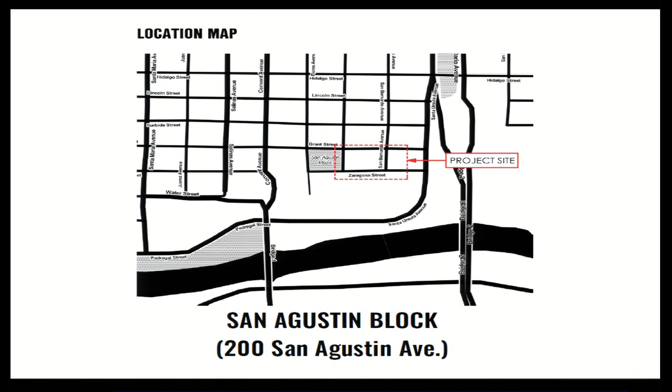All right, so here's just a quick map of the location. We all know where this is. Yes. All right, Historic Plaza.

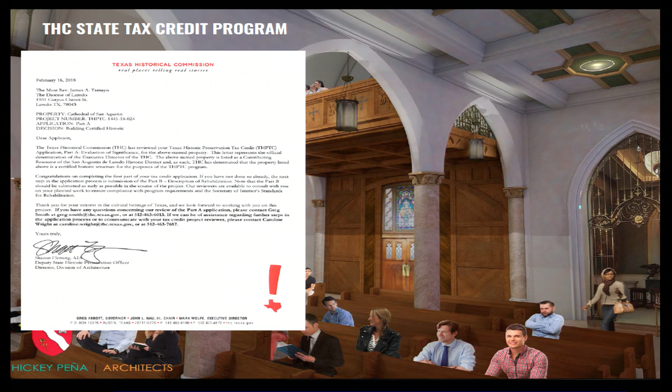Just a quick note, and I'll let Frank elaborate more on this, but we have been approved for the tax credit program, the preliminary approval, the Part A. Frank, do you have... Yes, so, yeah, we're really happy about that. We submitted this project to the Texas Historical Commission to be considered eligible for the State Historic Tax Credit Program. It's a three-part process. Part A we've completed, which designates it as eligible. The way that works is we can bring back 25% of the approved costs for rehab and restoration.

Any historical significance, those are applied, and that's Part A, which has been approved. We're currently in the Part B portion, where we've submitted all of our drawings for review, and they are now in the process of checking off what is eligible. It runs concurrent with the construction, so we're on target. Part C is once everything's complete and documented, that's when we submit the last part of the process. We're right in the middle of that process as we speak.

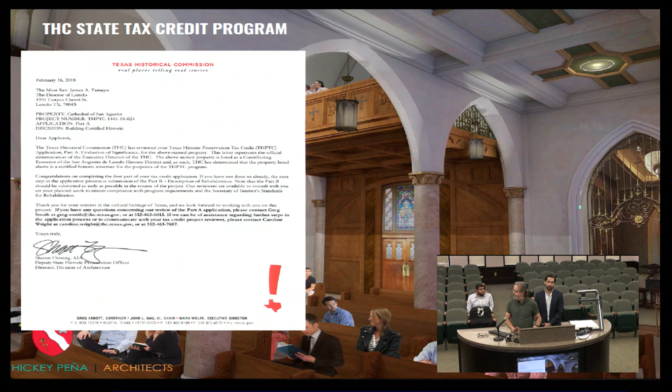Also to note, because this process is underway, and because of the status of the cathedral with the state, we have been interfacing every step of the way with all of the design approaches we've taken with THC, and we've got some approvals from them here to show you for our approaches and necessities for the project.

This first one here is almost maintenance, but we are working with a new consistent color. The fencing around the cathedral, noted here all the way around both buildings in red, is slated to be repainted, and we've submitted a paint color for you to consider.

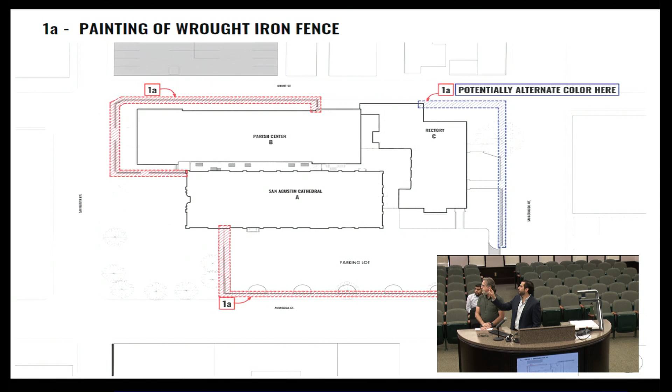There's also a blue portion of the fence that's higher, and we're asking you to approve an optional second color for that. We need to do some studies on site, painting a good portion of it to see how that's going to interact with the streets, the much taller fence.

Right now it's painted white, that area is a light color. We fear if we paint it dark, it's going to have an adverse effect on the look of that corner. For consistency's sake, we're planning on attempting the color in dark, but if we feel it's too imposing or too character-changing, we're going to go with the white that exists now.

That taller fence, is that at the rectory? It's behind the rectory, correct. It encloses the carport that exists there for service access. It faces San Bernardo and then a little bit of Grant Street as it turns the corner west to Grant.

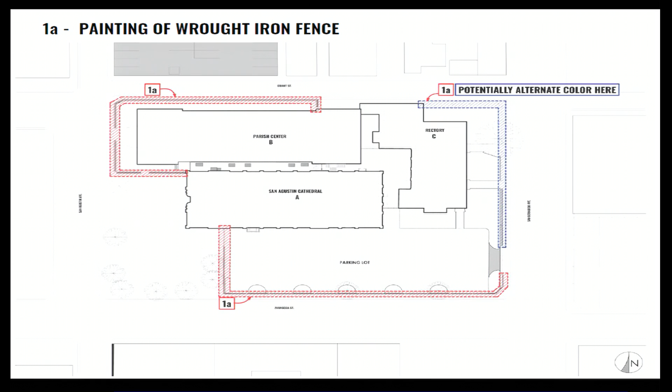So then everything in that perimeter is going to be the same color? Yes, obviously, except not the plaza wall - there's a wall that is all masonry that faces the plaza, that won't be. But the wrought iron, correct - yes, everything that is wrought iron would have the same color, with the exception of that portion we mentioned.

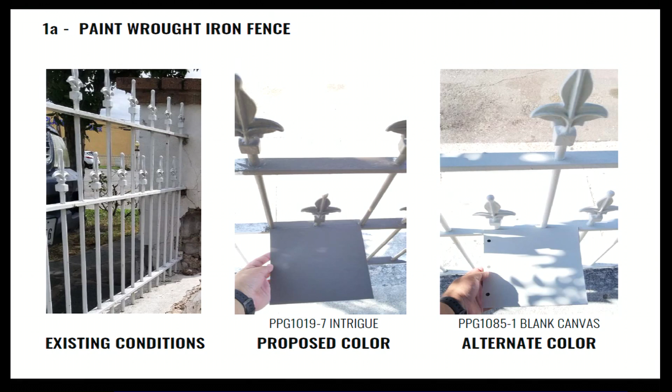All right, so the next part, are there any questions about that one? Do you foresee, like you said, you're going to try the dark color first, and then if not, switch? So we're kind of approving both here? Yeah, we're asking for approval for both, or for either. For either, both, either, yeah.

All right, so this next one is fairly straightforward. There are some mechanical units that were placed sometime in the past. We know that it's later than 1955 when all these units were installed, and obviously they've been replaced along the way through several maintenance campaigns.

But there are mechanical units scattered throughout the alley between the parish center and the San Agustin Cathedral, and there's one unit on the south side of the San Agustin Cathedral. That's this portion marked here, and these are the compressor units for the HVAC that's in the cathedral. Those are an issue.

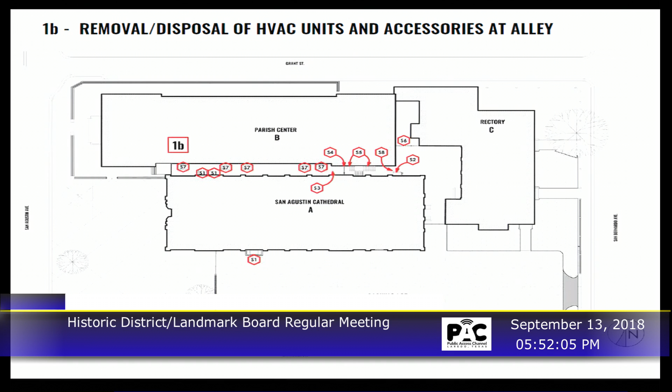Because they generate the most amount of noise coming from the outside, which deters the spoken quality of a mass. Our strategy here was to remove as much of that to mitigate the sound intrusion from all of the mechanical systems. So this is part of an overall plan to remove mechanical units from around the building. There's also, I think, a very nice visual benefit to removing them. Obviously, these are modern elements that weren't there in 1877,

But the noise factor is really significant. So our strategy is to move all of the mechanical tonnage on the exterior off-site. They're not being replaced here on-site. They're being replaced off-site at a parking lot owned by the diocese, right in a corner.

If you're all familiar with the property just east of this, across the street, in that corner, we would be putting a chiller system, and it's one unit that is sized to take care of all of the cooling needs for both the cathedral and the parish center.

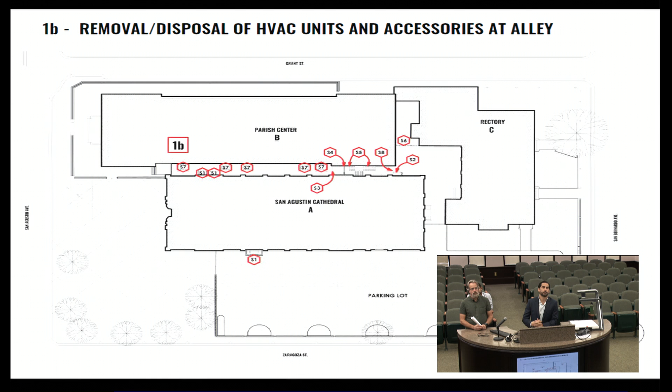So, the parking lot, that space, is it across the street from the old school? From the plasma center? Oh, from the plasma center. Back here, it's between the cathedral and the Antigua. Mm-hmm, okay, it's right next to the museum. Yeah, it's by the plasma center. So it would be very far away from this most significant historical structure, which I think it does well, to keep it away from that.

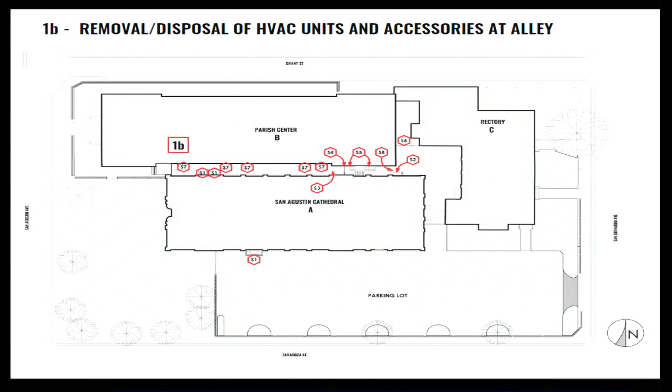Efficiency-wise, and the way we can now size it, so that when the parish center eventually hooks up to the same unit, it could take the same benefits. We would be able to remove the compressor units that are feeding the parish center, so we'd be free of compressor units all the way around both of these buildings.

I know you said Building C was not going to be affected, but will the rectory also make use of that, or does it have its own? It has its own system, and we didn't see the benefit to using it. It's new enough and it's fairly well resolved.

As you know, in 2000 it underwent restoration after the fire, and a lot of these more modern resolutions to the HVAC system have been resolved already from a historical standpoint. In these two buildings, that hasn't happened. So it's now bringing in a compatible type of system to allow for a more historical resolution and the preservation of the historical character on the interior of the building, because the HVAC units, I think, are a hindrance to that.

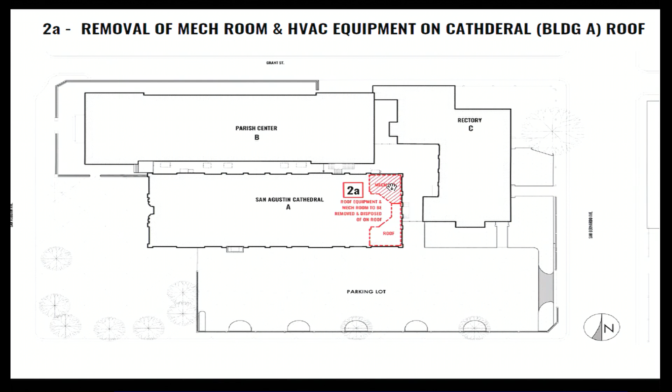Just pictures of the units that are going to be removed. So this is a portion of, again, the mechanical units that will no longer be used. They're housed in a modern mechanical room that was built over the sacristy. The sacristy was built circa, we dated it from between 1945 and 53, when that expansion of the sacristy and the sanctuary was constructed.

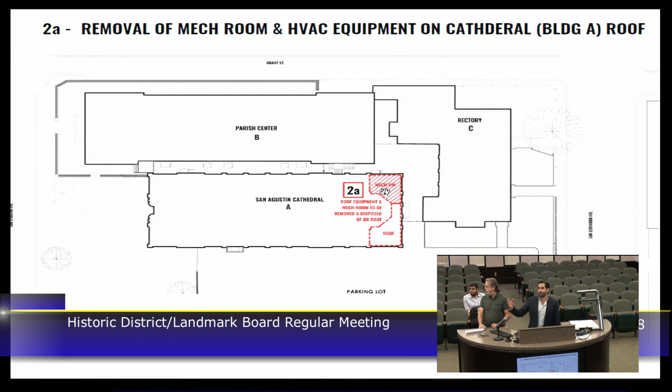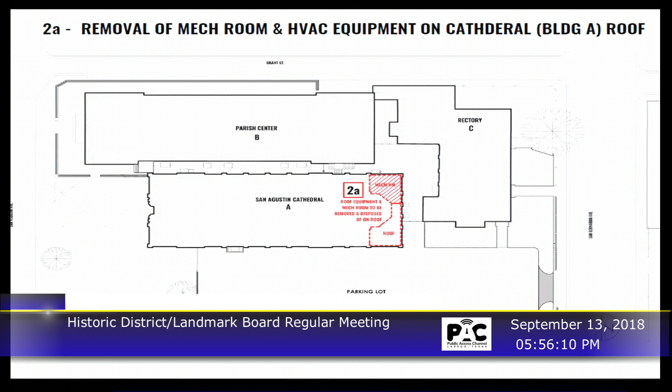And then after that, a mechanical room was built over the northeast end, covering a historic window behind the altar. So now that historic window has a fluorescent light inside that attic, to simulate the light from the sun. So we have the opportunity now, with these new systems we're installing, to eliminate that completely, and to bring that east portion of the facade back to that campaign that happened in '53, where they expanded the sacristy, and prior to the building of that.

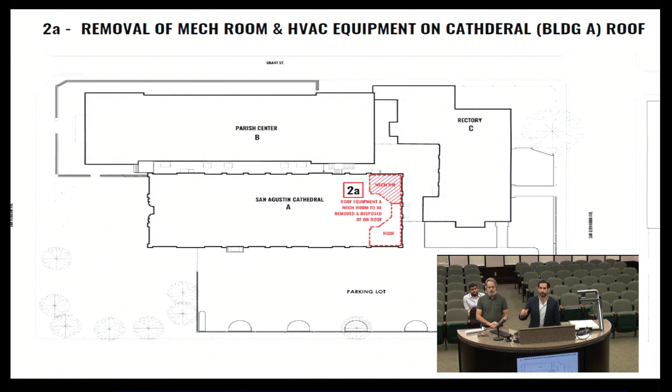So here's a picture of it. This is the portion of the building that was added when the sacristy was added. There's a duct that we all don't like going around the back of the cathedral, around the sanctuary, creating a taller volume of the building. And then these are walls that were built over, the more historic walls of the sacristy.

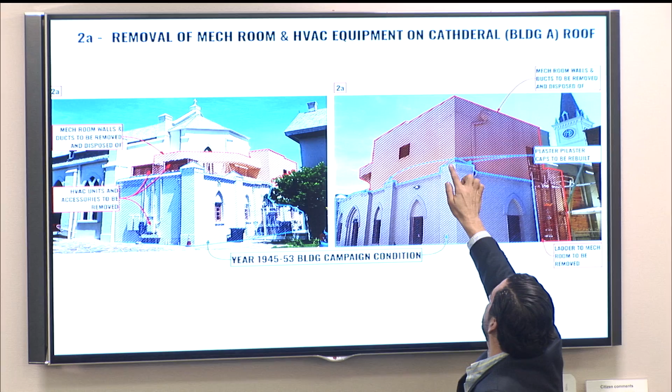So as you can see, we've outlined here in blue where we're removing the new and keeping the old. And we're reconstructing some of these caps to match the ones on the other side.

I have a question. I know at the beginning of your presentation you discussed working with THC. I understand THC has already given the green light, and I don't want to jump too far ahead of your presentation, but to some aspects of what you are proposing here before us. But have they, and I realize you're talking about something that was added in '53...

...but has THC looked at the proposed demolition of that mechanical room? Of this modern mechanical room? Yes, they have looked at the entire project. Okay, they reviewed it and they have had no comment on this particular one. We haven't gone and specifically pinpointed that question to them.

As far as we knew, the order in which we approach THC and we approach this board, there's been different approaches to that, like which comes first. So what I could tell you is our conversation about the whole thing is ongoing, and this will come up soon, but going to this board and having you consider that, I think is independent of THC for the most part.

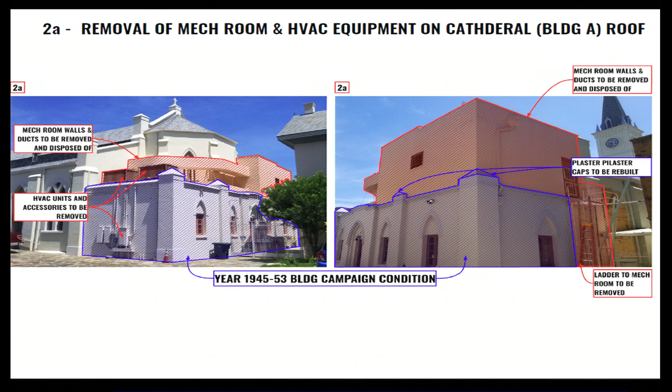Do we have it in writing that they say it's okay to remove this? No, but they said it's okay to go back to nineteen fifty-three, and that's what we're doing. So I see it as an approval.

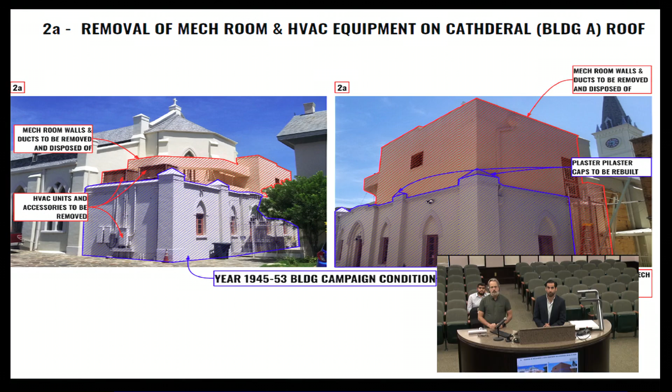So, it's almost like a prerequisite for a request that they've already approved, to go back to nineteen fifty-three. I understand, with research done, THC said that they were not aware of the demolition of the mechanical room. Got it, I understand. Then we're specifically aware of that. Understood.

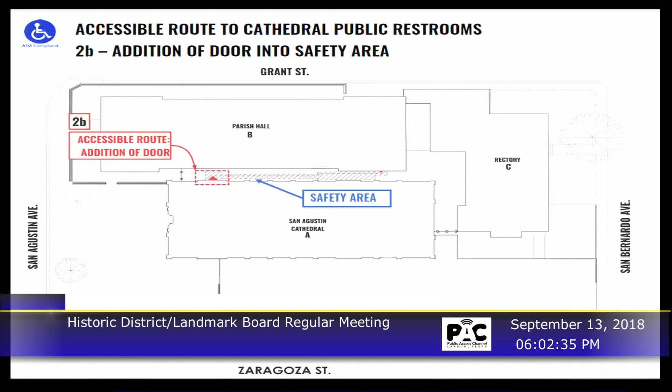Accessible route to cathedral and public restrooms. This is one that, again, we didn't feel was going back specifically to 1953, so we asked a specific question to THC at this moment. Not to say our conversations with THC are over, obviously not, but we did feel like we should ask this to make sure we're going in that direction, and they agreed.

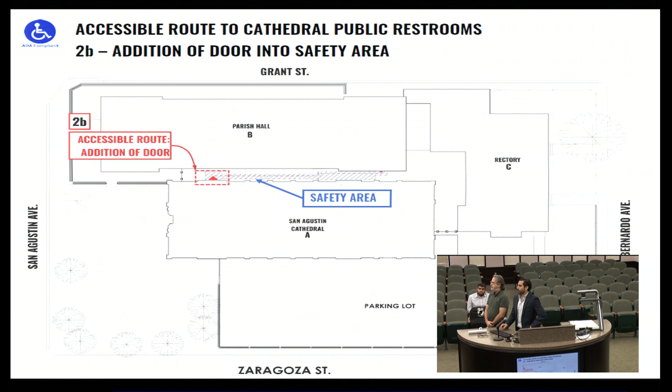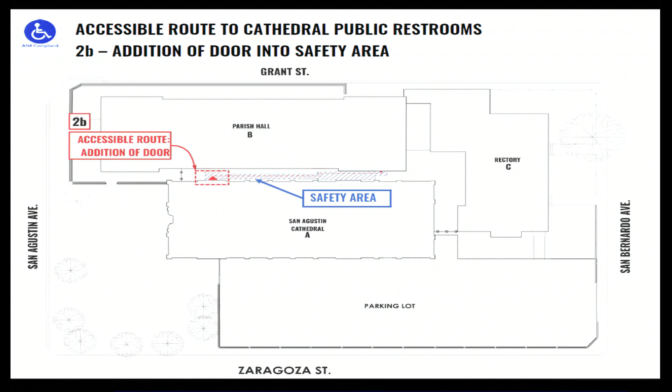So we have planned accessible restrooms where they actually exist now, but we're making them larger. Right now, there's only 2 single compartment restrooms right there inside the parish hall with access to this alleyway. It's not ADA compliant. The canopy that's on there is a makeshift canopy that I'm not aware was approved at any point.

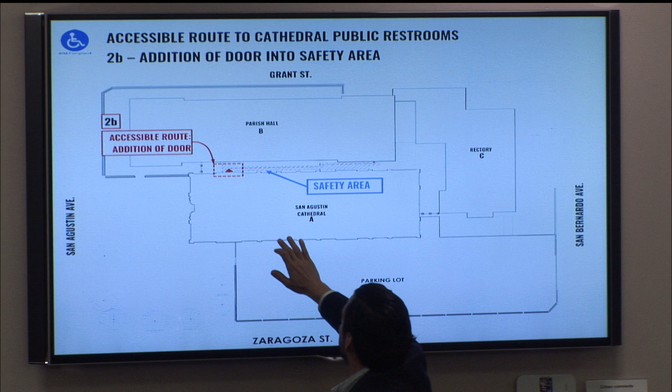Bathrooms are here, and the way to access them is through a safety zone, which is this alleyway. The diocese was very concerned with people having to go, especially kids that need to go to the restroom on their own, then come out into the exterior and have exposure to the rest of the area that isn't within the confines of the facility. It was important to make sure this gate was secure, this makes it secure.

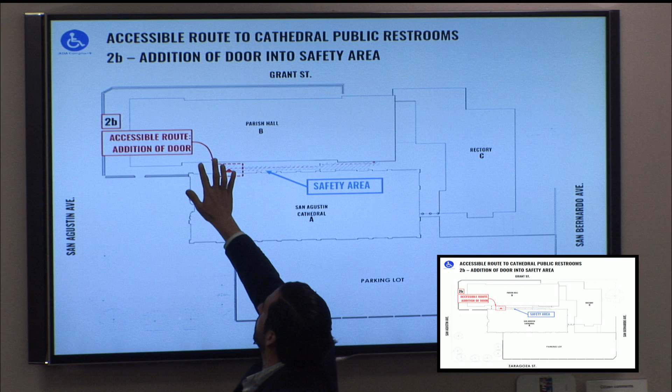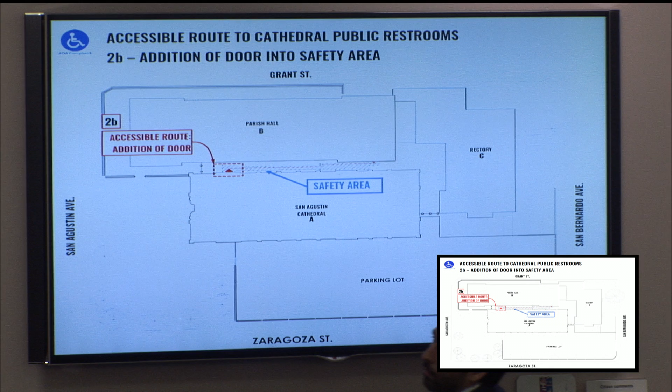So now we have a secure on-premises courtyard, so that our access path from the proposed door coming out of what is now the confessional on the north side. Then we use that path to go and access the restrooms back here, because right now, the only access to the restroom is the door that's closest, on the east side. Correct, that's the only access to that.

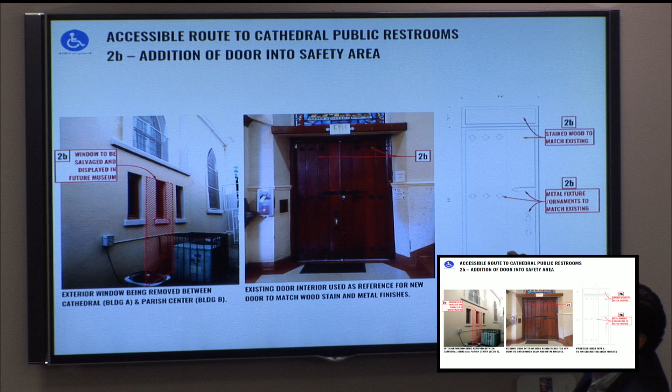On the right, you see our precedents for the door design. These doors are found again on the same side, on the north and west side of the cathedral. These are those auxiliary exits. So we're using this to create a restoration of that, but as a single door for that doorway. So this is then that design for that, all the doors will match. Correct.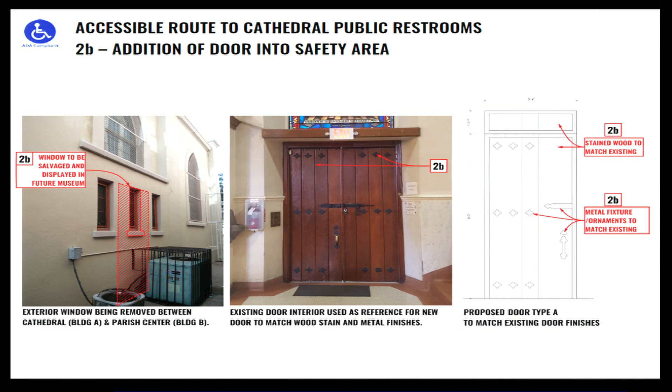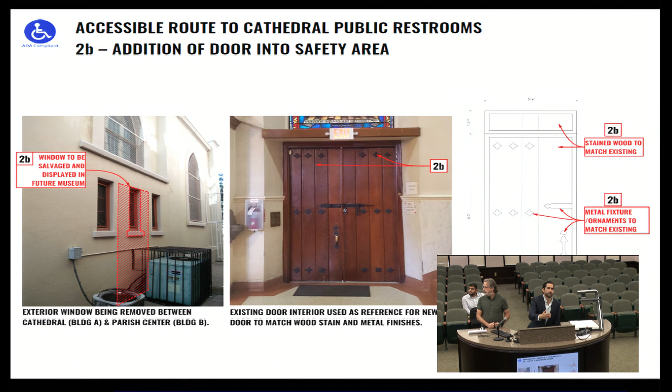And I understand that even those windows date back to 53. Those three windows, some of them we've been able to specifically note date back, not specifically to 53, but definitely prior to the expansion of that altar, because we believe there were two construction campaigns there, one in the 30s and one in the 50s.

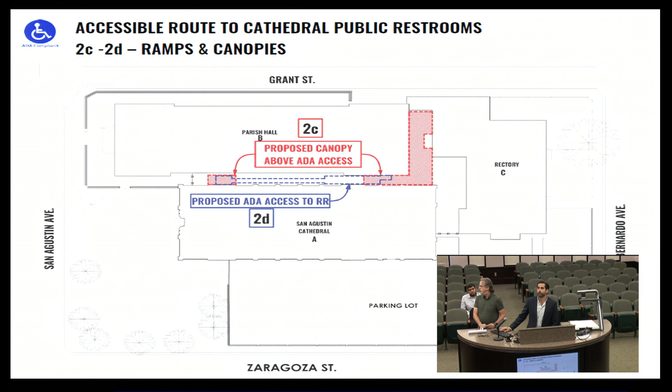Accessible route to the cathedral, again, we're just talking about the walkways and platforms that are ADA compliant to get you into the restroom, and the canopies that give you some cover. These are freestanding canopies. This was a question we got from THC: are they freestanding? The answer is yes, they're freestanding. And when do they touch the building? They touch the building only at the entrances and exits, and they were okay with that solution.

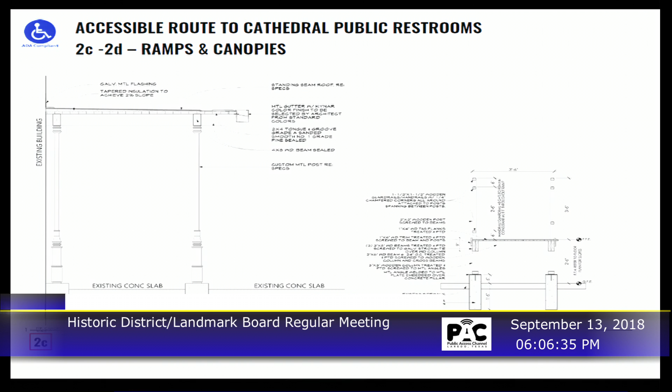All right, this is a section, I'm sorry you can't see it clearly here, the computer isn't cooperating, but just a picture of the wood platform that takes you there, and then a canopy, and there's a little bit of a rendering. So this is the church, that's the school building, and so then we have the system of canopies.

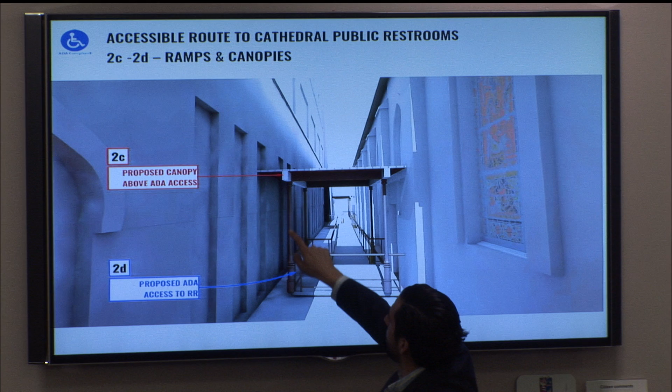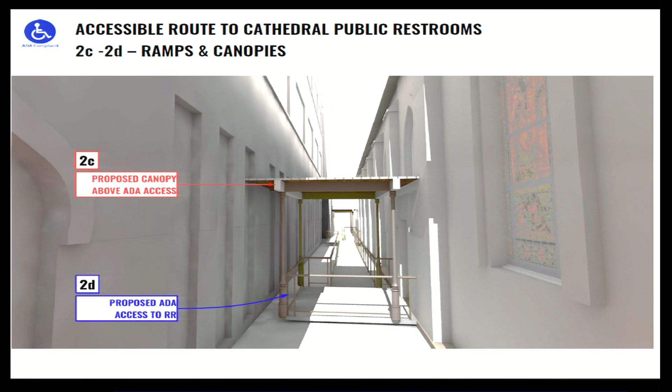We do have some decorative pipes that hold up a very simple canopy. We think it's complementary to the design of the cathedral. It's metal pipe with decorative collars all the way through, and the top is a metal substructure or superstructure, with wood 2x4 stained wood decking with a metal roof on top, and then gutters on each side. So it's a very light design canopy. We want it to be as least obtrusive as possible and impactful as possible.

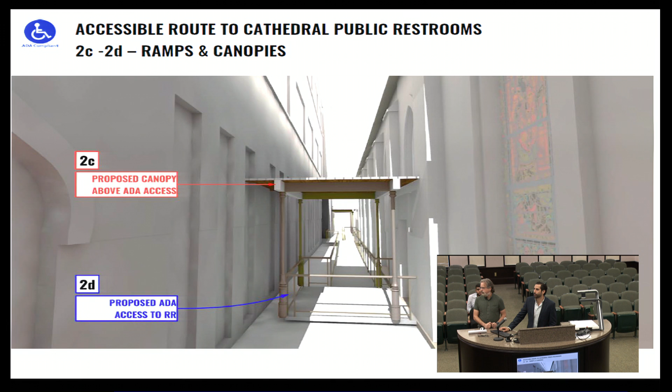The next couple of items are for the parish center. As you may know, part of the construction progress is going to halt the ability for the diocese to have masses at the cathedral, and so we're using the parish center as a temporary worship space.

We've been having to make several adjustments and modifications to the building to prepare it for this. The HVAC units were inside the main auditorium, making a whole lot of noise. Again, we have a problem with the noise, no one can hear the service going on.

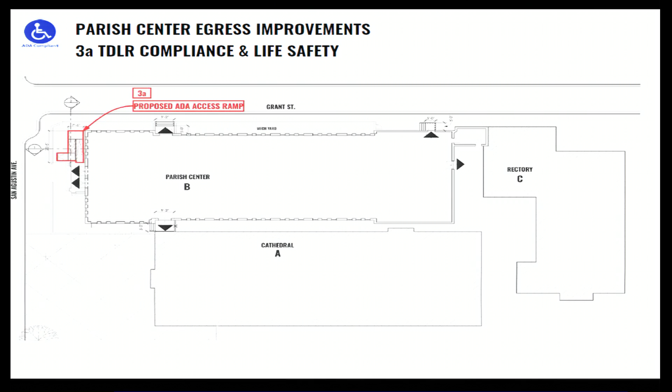We did an analysis, kind of what we did in the church, where we figured out what the long-range needs of that building were, to make sure that any short-term modifications to prepare it for this place to be a worship center were in line with the eventual expenses and modifications to restore the building as a whole.

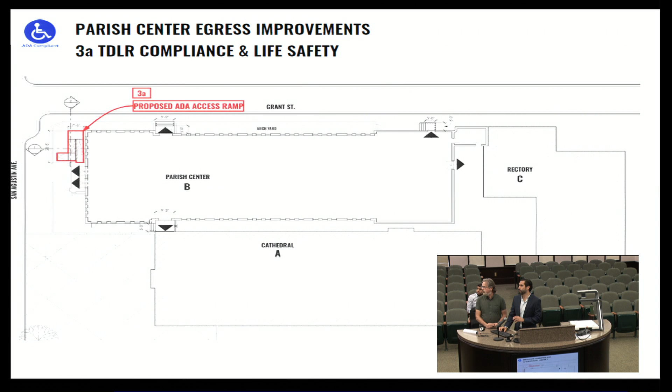So that includes a lot of hiding of ducts all over the building, so we can then expose the tin ceilings, for example. There's a lot of work there to restore this. I think it went fairly well, it was very successful.

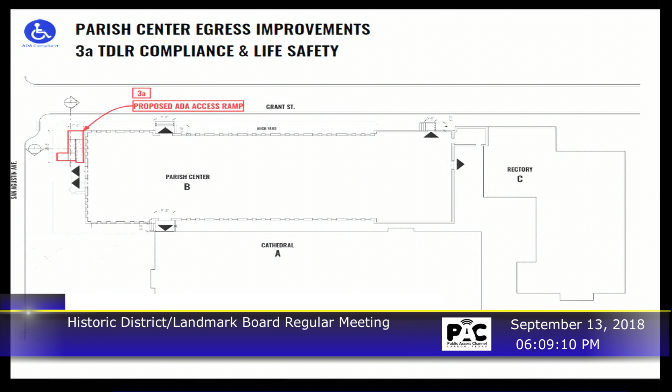The HVAC system is a very big challenge. A lot of these places have exposed ducts, or an acoustical ceiling tile to try to hide those ducts, and then you look behind them and see these gorgeous tin ceilings covered all over the building. So we're doing a lot of mechanical work in this building to be able to expose and restore all those ceilings.

Part of making this work is access, ADA access to the building. There's a ramp there now that doesn't have the correct slope to be an actual ADA ramp, so we're replacing it with just a simple ADA ramp here at the front of the building.

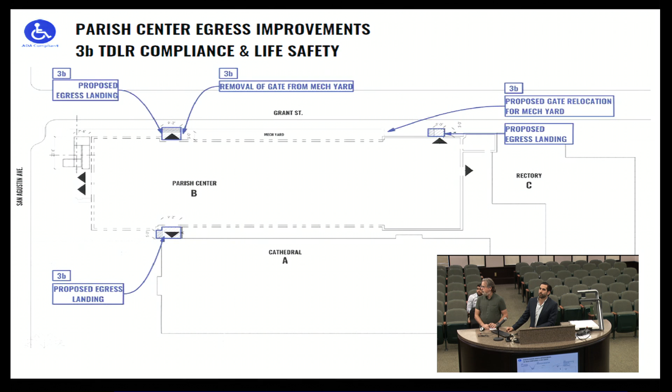Upon having several meetings with the fire department to see how egress would be taken care of, one of their concerns on the exterior - we've taken care of a lot of their concerns on the interior. One of their concerns on the exterior is that none of these doors to get out have landings.

So it's very dangerous to just get out and step right onto the first step down. It's a hazard as people are trying to get out during an emergency or a fire. So we're adding these landings on these egress doors throughout.

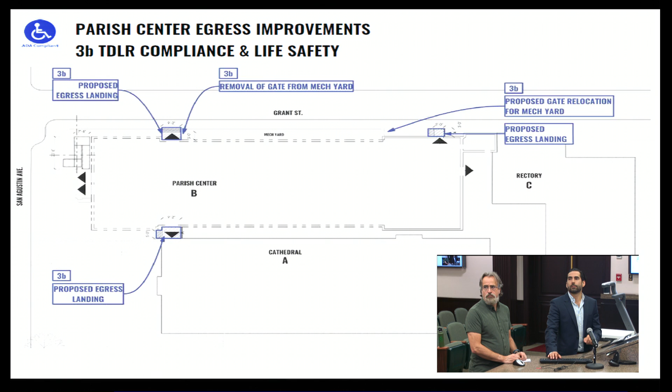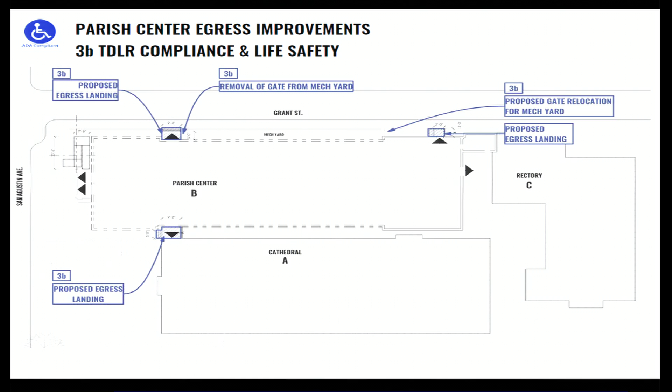This is just the location where they were. There is one landing that we wanted you all to consider, because - I'll go back and forth from that - this landing here has two mechanical yard walls on either side.

Can you go back to the drawing, to the picture? Actually, go forward, sorry, forward. And one more, there we go. Here - so you've got these two walls flanking this stairway. To make the landings happen, we're having to bring these stairs out.

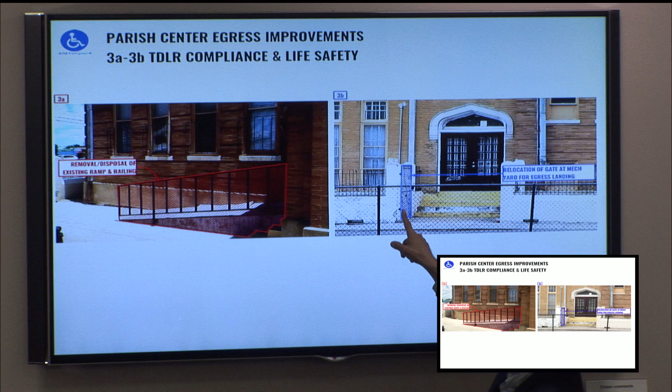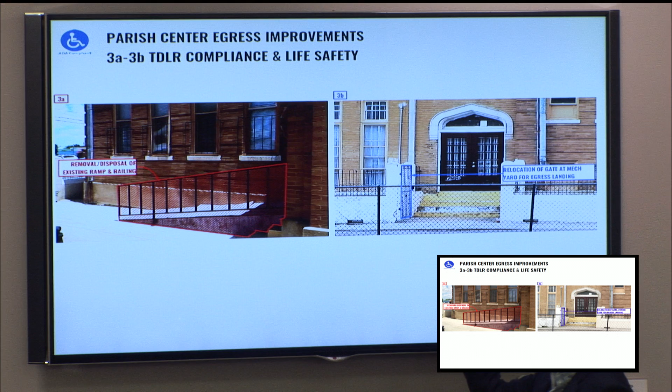This gate gets in the way to get into the mechanical yard, which, by the way, is not in use anymore, but the gate's there. So what we're proposing to do is continue this wall all the way across, so it looks just like this, and then add this fence right where the gate was, and put the gate on the opposite side, just to have access to that space.

It's for cleaning, because there are some storm drains there that need to be cleaned out. So basically that gate that was here would just go on this side - same condition, just on the opposite side of the building, on the opposite side of the mechanical.

So that's the change. On the left is the ramp that exists now, and it's obviously not compliant. Non-compliant, yeah. Everything there looks like a piecemeal. Yes, okay.

So that's our presentation. It's here to answer any other questions you might have.

So then, going back to the addition of the door, the primary exit for using the restroom facilities will now be that door? Correct. Okay, because the other door really conflicts with the mass if people continue to go out that door in the front. Yeah, that's always been a problem.

So how long do you all foresee the cathedral being closed for? 18 months. So in that time being, it'll be the parish hall next door. Correct.